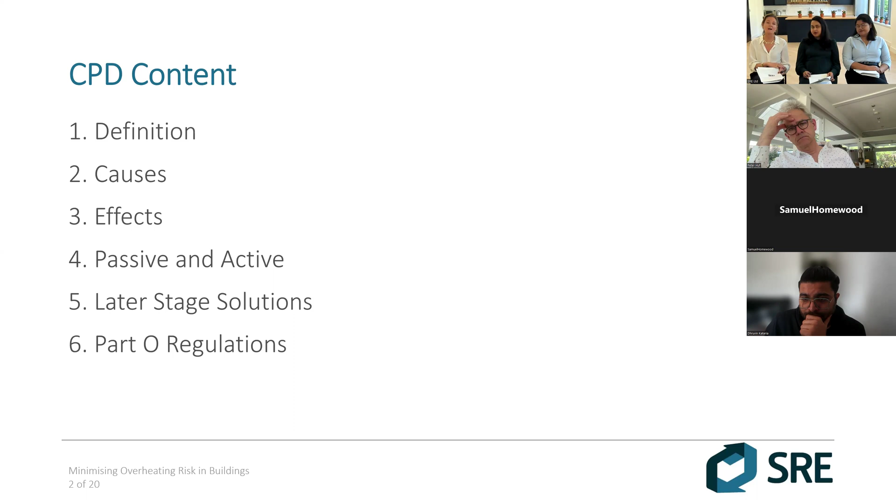We're aware that probably all of you will be involved in projects that are beyond the early stages of design, and also many of you will be working on retrofit projects. So we've tried to include an entire section looking at later stage design solutions, again, minimising overheating risk. And I'm sure you're all aware that it's Part O that has been brought in to legislate in this area. However, there are other standards where overheating needs to be taken into account.

I do need to say that we've actually had a fire alarm today, and we've been outside for quite a bit of the morning. So this presentation isn't going to be quite as slick as we would have wanted, but we have been practicing for a while. Meera, you're going to start with the definition.

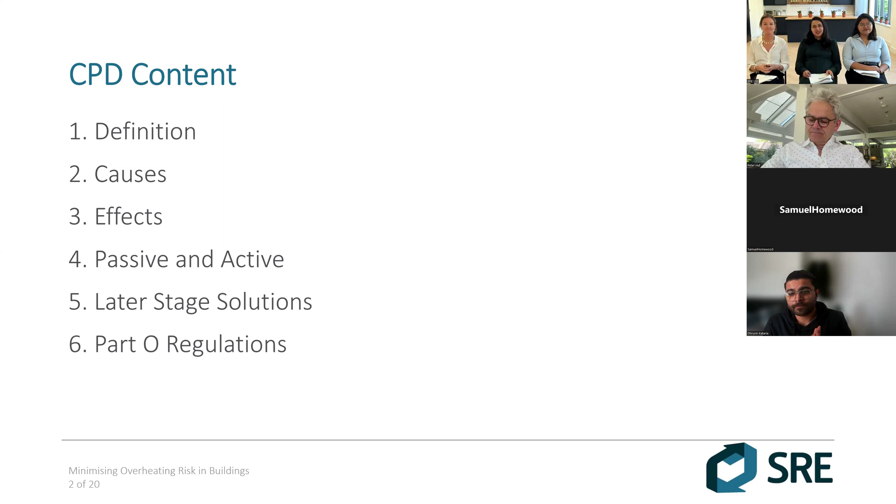Thanks, Anna. The term overheating refers to the discomfort to occupants caused by accumulation of warmth within a building. The World Health Organization guidance on thermal comfort states that in temperate zones, temperatures above 24 degrees Celsius can cause discomfort to the more fragile and susceptible members of the population. It is important to note that although air temperature is used to assess overheating, there are other environmental factors associated with overheating that affect the actual temperature as it is perceived by humans. These other environmental factors include lack of air movement, relative humidity, radiant heat, and period of exposure.

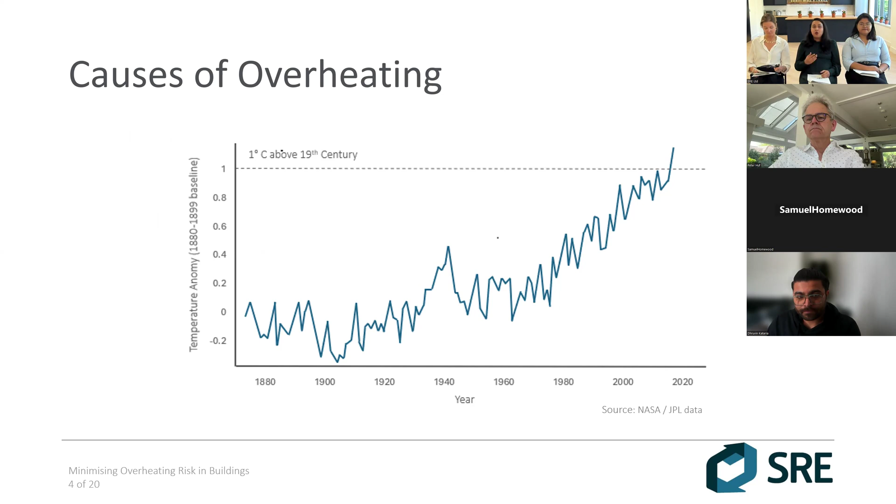Recently, human-induced climate change has had observable effects on the environment. As the graph shows, the global temperatures are rising, and as we all know, the global average temperatures have risen more than 1 degree Celsius above the average temperatures of the 19th century. Experts believe that if the global average temperature is not limited to well below 2 degrees Celsius above pre-industrial levels, we will have to face serious consequences of climate change.

As the temperatures increase, our cities warm up, creating a phenomenon known as the urban heat island effect. As part of the UK's drive to achieving net zero emissions by 2050, we are trying to reduce the energy demands of the building. For that, we are constructing highly insulated buildings with increased air tightness and low ventilation rates, which causes the heat to trap inside.

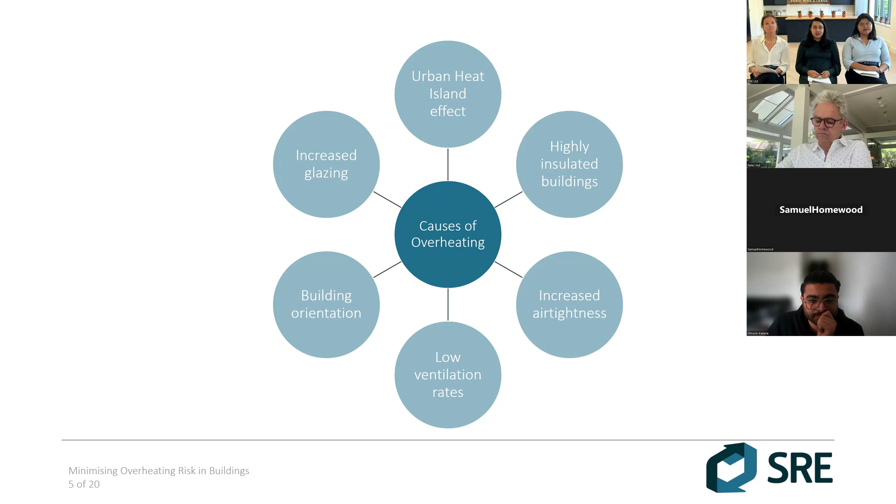Building orientation plays another key role. For example, if a building has its larger sides exposed to east and west, it has a high risk of overheating. This is because the solar gains are maximum from these orientations, and moreover, it's difficult to shade these sides. Most modern buildings today have high glazed areas, and this is another causal factor for overheating.

Low thermal mass becomes another reason for overheating. For example, most of the prefabricated structures that we use today have very low thermal mass. Prefabricated structures can be great in terms of quality, time, cost, and waste effectiveness. However, lack of thermal mass can lead to overheating.

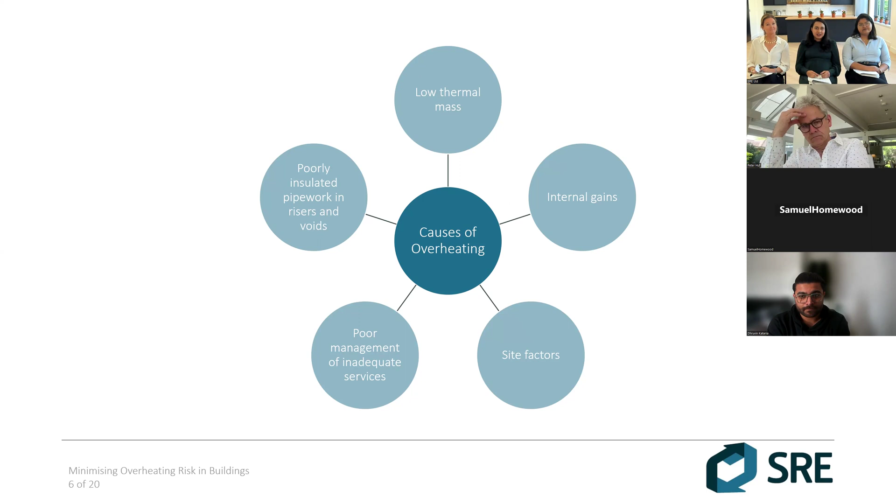Internal gains from various activities, people, equipment, appliances can all build up within a space. And if this built-up heat is not expelled from the building by natural or mechanical ventilation, it can lead to overheating. Sometimes there may be restrictions on opening windows due to noise, pollution, or security concerns. Poor management of inadequate services, poorly insulated pipework in risers and voids can all increase the risk of overheating in a building. Alisha will now explain why overheating becomes a concern.

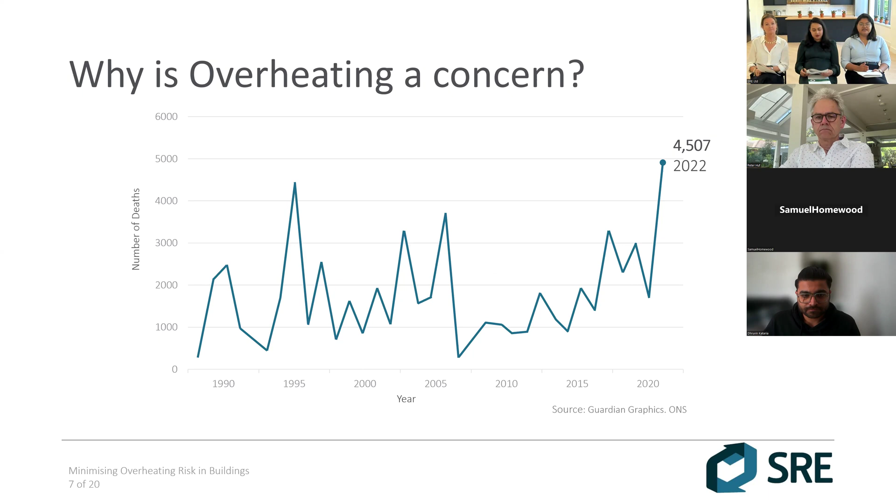As Anna had mentioned, excessive heat can reduce productivity and induce stress in people. Hot spaces can also cause heat-related issues in both elderly and young children. Overheating can cause sleep disruptions, which can lead to many other health issues. As shown on the graph, it is estimated that, on average, there are around 2,000 heat-related deaths in England and Wales each year. And with the temperature rising, it is estimated to more than triple by the middle of the century.

The UK Climate Projections 2018 predicts that there would be a 2-degree global warming above the 1981 to 2000 baseline by 2050 and a 4-degree global warming by 2080. However, although they are predicting a 4-degree global warming across the globe, this warming is not going to be uniform. The UKCP predicts that the south of England is going to overheat by around 8 degrees Celsius by 2080, whereas the global average temperature rise will only be 4 degrees Celsius.

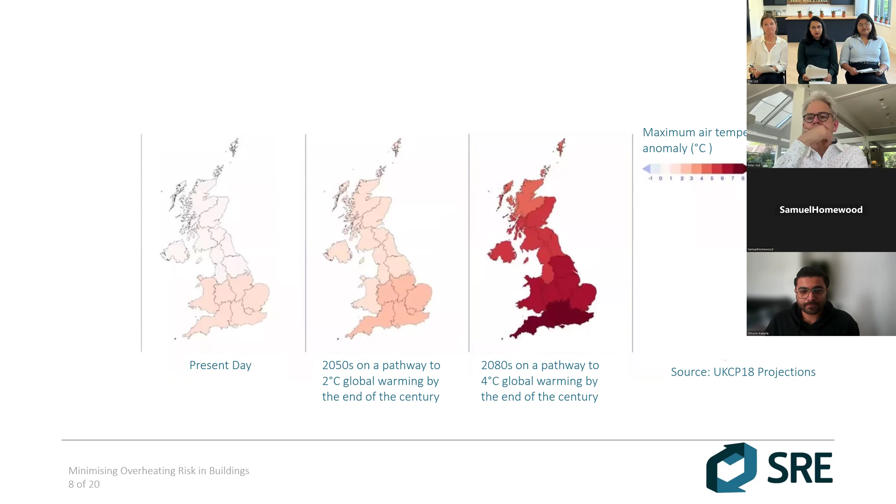There are a number of mitigation measures to reduce the risk of overheating. Ideally, passive measures will be considered in the early design stage in order to minimise the use of active measures. This is actually HUF HAUS's show house. We've been working with HUF HAUS since 2007. I know that we've got Peter Huf on this presentation, which is great. And they use passive measures quite extensively in the design and orientation of their buildings to good effect.

Building orientation needs to balance the need for solar gains in winter with the need for protection from the summer sun. Buildings should ideally be orientated with the largest facade facing south, ideally within 30 degrees plus or minus. Although changing a building's orientation isn't going to be viable for those of you who are doing retrofitting projects, adding external shading is. Horizontal shading is recommended for south-facing facades.

Overhangs and external shading: it's advised to subtend an angle of 60 degrees from the lowest level of glazing in order to ensure the building can benefit from the lower sun in the winter for solar gains and protect against the higher summer sun. On the east and west facing facades, vertical shading is recommended, and vertical fins or louvered shutters are examples of good vertical shading there.

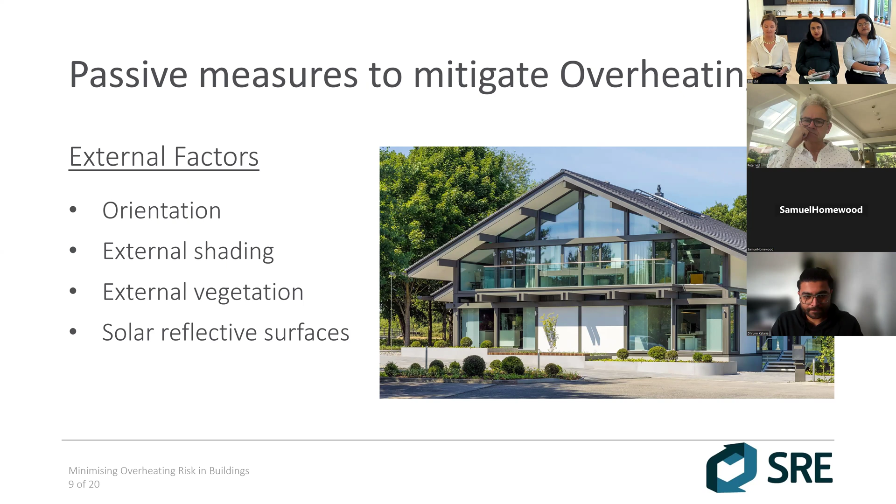We all know that glazing is very key for visual and thermal comfort in any building. And as Alicia has touched on, a lot of modern buildings do have a lot of glazing. However, there are important factors to consider in order to minimise overheating.

Firstly, it's important to have the correct window to wall ratio. Leading research organisations such as LETI and Passivhaus Trust publish guidance according to the building use. For example, they recommend 20 to 25% window to wall ratio for south-facing facades, and 10 to 15% window to wall ratio for east and west facing facades for residential buildings.

However, as we all know, each building is unique and each context is unique. So we also do glazing optimization studies to ensure that the glazing for your building is designed to maximize all benefits. Secondly, when choosing glazing, it's important to choose the correct glazing. And this is where we need to be thinking about U values and G values.

U values measure the rate of thermal transmittance through any structure or any building fabric. And it's really important to get the lowest U value that you can possibly get for your glazing in order to reduce heat loss in the winter.

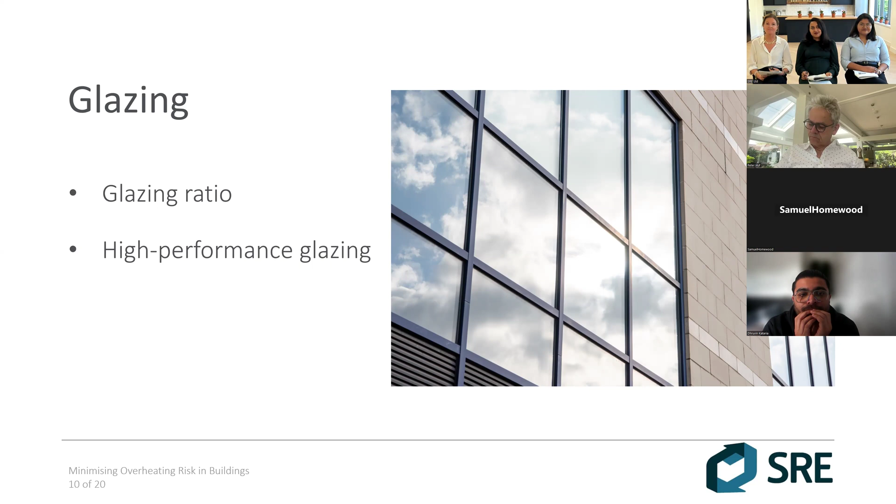So when it comes to the building form, a simple design is always preferred. The aim is to reduce the area of the exposed surfaces and obtain an optimal surface area to volume ratio. Simple design can also be great in terms of reducing the embodied carbon of the building.

As we all know, hot air tends to rise, and with higher ceilings, this hot air can accumulate at the top of the room, allowing the lower portion of the room to remain at a cooler temperature. And moreover, higher ceilings can foster airflow within a space and thus help in reducing the temperatures of the spaces.

Thermal mass is the material's capacity to absorb, store, and release heat. Thermal mass can be used to absorb heat during the day, preventing overheating of the spaces. And at night, when it is cooler outside, the heat can be released back into the space. Timber and steel frame structures are classified as lightweight and hence have low thermal mass, whereas high thermal mass structures would be brick, concrete, or stone.

When considering thermal mass, it is important to consider the thermal lag of the material. Thermal lag is the rate at which a material absorbs, stores, and releases heat. When the material with correct thermal lag is applied to your building, thermal mass can be used to keep your building cool in summer. However, if it is not, it can cause discomfort and also increase your energy use.

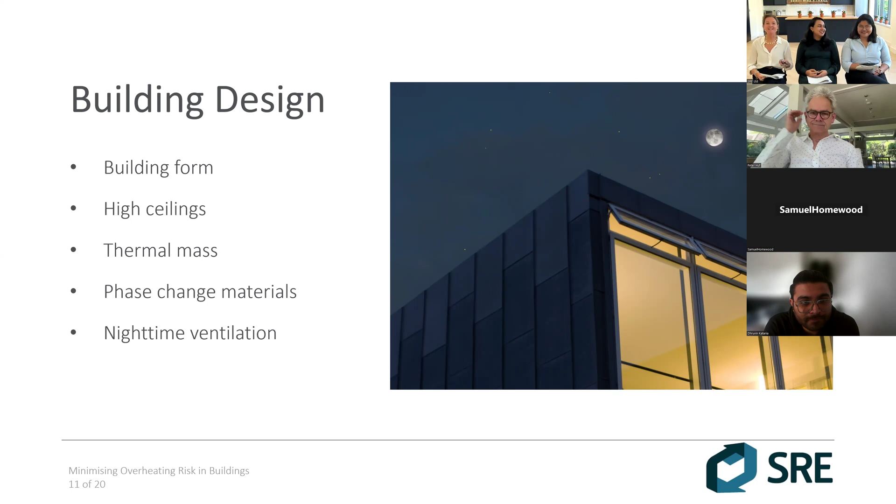Thank you, Meera. So ventilation plays a key role in maintaining the thermal comfort and the quality of air within spaces. So what better way to ventilate a space? The first and the obvious answer, openable windows. Whenever there are no restrictions placed on opening windows due to noise, pollution, or security reasons, we should always opt for openable windows as much as possible. And also the right placement of windows is very important.

Although we can achieve cross ventilation by adding openings on opposite facades of a dwelling or on the adjacent facades of the dwelling, the Approved Document Part O defines cross ventilation as the ability to ventilate a space using openings on the opposite facades of a dwelling and not by way of openings on the adjacent facade. Hence, corner flats pose issues with cross ventilation. The next one would be stack ventilation.

Stack ventilation is a commonly used technique where it uses the principle that with air pressure differences due to height, the air is pulled from the spaces and released outside. The temperature difference moves the air, and the hot air, which is of lower pressure, rises up and is replaced by the colder air, which is from outside.

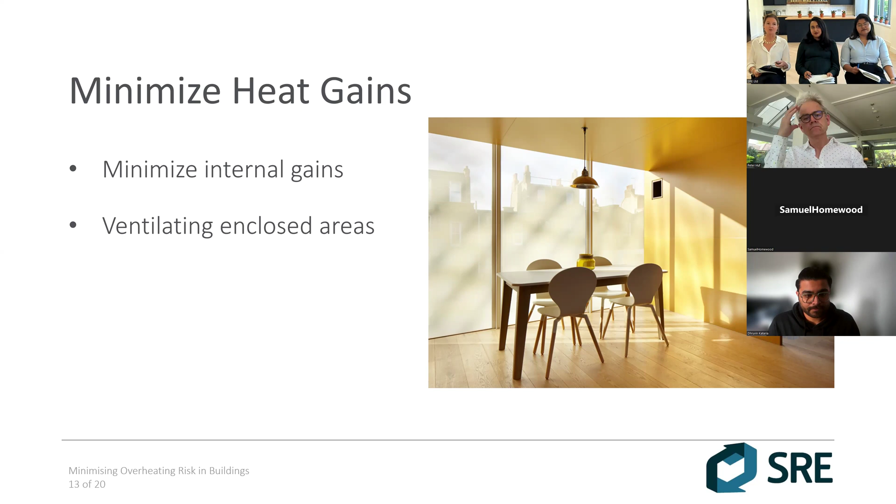Meera Davies is now going to look at more of the active measures that need to be considered for minimising overheating risk. As Anna explained, we always try to recommend passive measures, but sometimes active measures are inevitable. So we discuss some of them. MVHR stands for Mechanical Ventilation with Heat Recovery. It is a whole house ventilation system that supplies and extracts air from the property.

This system can reduce the heating and cooling demands of your building, and if correctly installed, can make your home more energy efficient. It should be noted that for the MVHR systems to work efficiently, you need to have a good air tightness level for the building. And we recommend MVHR in situations where natural ventilation alone cannot solve the overheating issue, and also where there are restrictions in opening windows due to noise, pollution, or security.

Purge ventilation is a manually controlled ventilation of a space or a room at a relatively high rate to rapidly dilute the pollutants or water vapor. It can be done by active measures, by the use of fans or extract, and by natural measures, for example, by opening the windows. Adding ceiling fans to the space can greatly reduce the overheating. Although it doesn't reduce the air temperature, it can, however, mitigate the effects of overheating on building users.

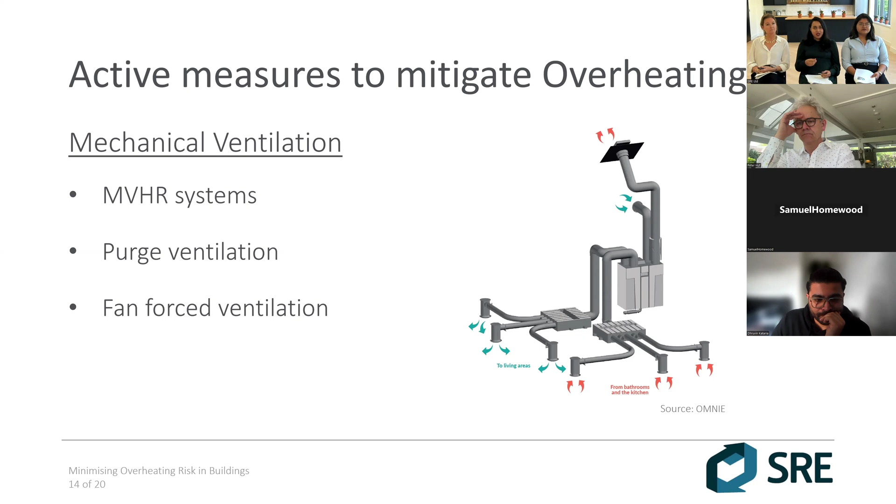And whenever there is a communal system present in the building, we generally give recommendations on how to reduce the heat gains from these systems, so the architects can coordinate with the mechanical engineers to ensure that these recommendations are followed. Some of the recommendations include adding insulation to pipeworks, heat interface units and storage vessels, lowering the flow temperatures in the communal pipework and systems, having energy efficient systems and control strategies, and minimizing pipe runs.

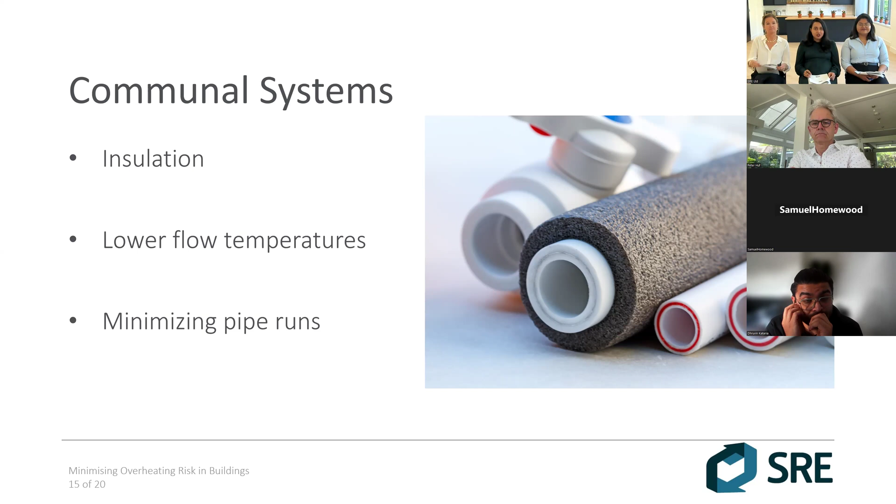Alicia will now cover other design recommendations and solutions that can be considered at later stages of the design. Thank you, Mira. It is best practice to always involve a sustainability consultant as early as possible so they can make the appropriate recommendations. Unfortunately, this is not always the case, and it leaves them constrained to very minimal design solutions, which often interfere with the frozen design. However, we are recommending certain solutions that can be noted when we are too far ahead in the design stage.

We had already mentioned that not all windows can be opened due to restrictions posed by noise, pollution, or security reasons. But wherever feasible, we have to opt for openable windows and reduced fixed glazing. The approved document Part O puts restrictions on opening ground floor bedroom windows at night due to security reasons. In such situations, we can opt for tilt and turn windows, which can open as side hung during the day and as bottom hung during the night, providing secure nighttime ventilation. In addition, we can also incorporate security grills or internal lockable louvred shutters.

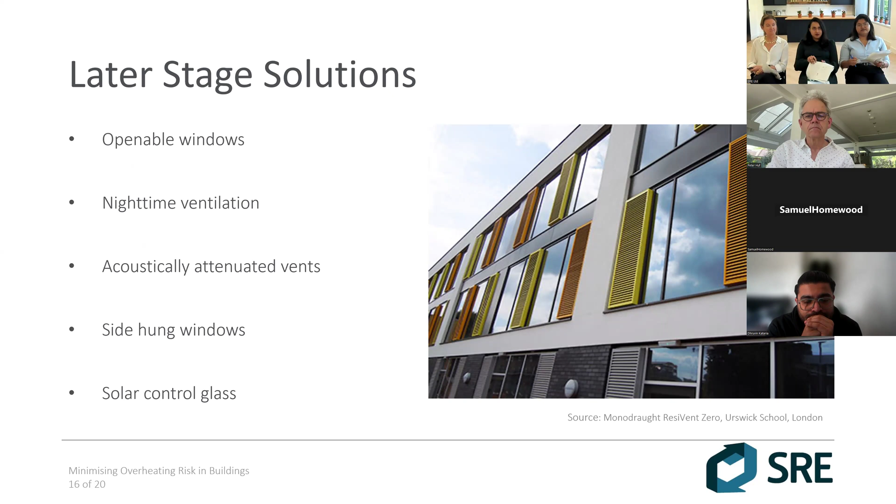When the previous recommendations are not feasible or good enough to bring your building to pass the Part O overheating assessment, you can look at ways to incorporate thermal mass into the structure. So the first and the easiest fix would be to add phase change materials, as it can easily replace the plasterboards from the walls and ceiling and add that extra thermal mass.

But it has to be noted that phase change materials are relatively expensive, and so it is not feasible for the majority of the projects. In such situations, you can always replace the lightweight internal partitions with blockwork. In one of our recent projects in Hounslow, which was a council home, we had recommended swapping the internal lightweight partitions with blockwork, which has significantly improved the thermal mass and helped the building achieve the required credits for Part O. Similarly, exposed concrete or exposed surfaces can also significantly improve the thermal mass of the structure.

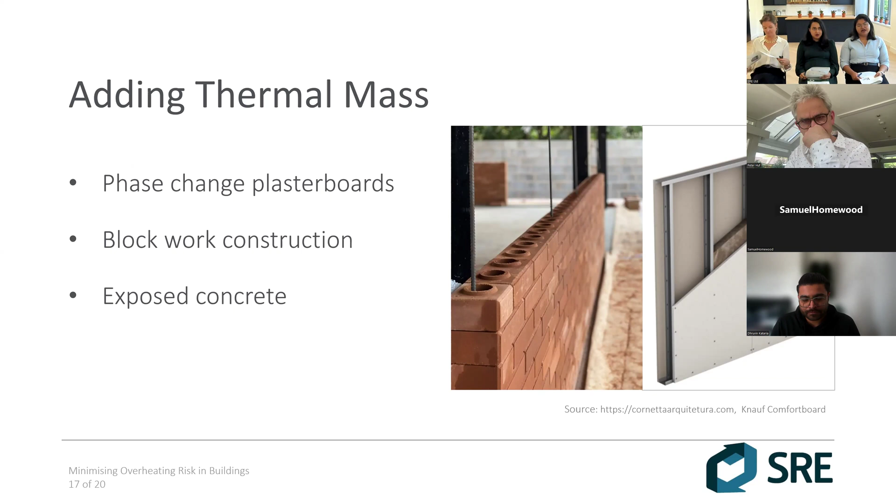Now we move on to regulation standards and methodologies. Part O became mandatory for residential buildings in the UK in June 2022. And the buildings that need to comply with Part O include residences, flats, student accommodations, care homes, and accommodation for children below 5 years of age. Often clients have asked us why student accommodation and care homes are assessed under Part O, whereas hotels are not. And this has to do with the period of occupancy. Hotels have a shorter period of occupancy, whereas student accommodation and care homes have a prolonged occupancy.

And there are two ways to achieve Part O regulations: the simplified method and the dynamic simulation method. In the simplified method, your building needs to satisfy certain criteria regarding location, external shading, maximum glazing area, G value of the glazing, minimum free area, and of course, cross ventilation. Whereas the dynamic simulation route follows TM59 methodologies. However, it has got certain additional conditions beyond the TM59 methodology.

Over a period of time, our clients have contacted us with several questions regarding Part O, and so we are going to cover some of the frequently asked questions here. Part O or TM59 has some additional criteria for bedrooms and for the nighttime temperatures of the bedrooms, and so the bedrooms will have to meet both daytime and nighttime criteria. And as Alicia explained earlier, as per Part O, the ground floor bedroom windows cannot be opened at night unless there are secure measures to open them.

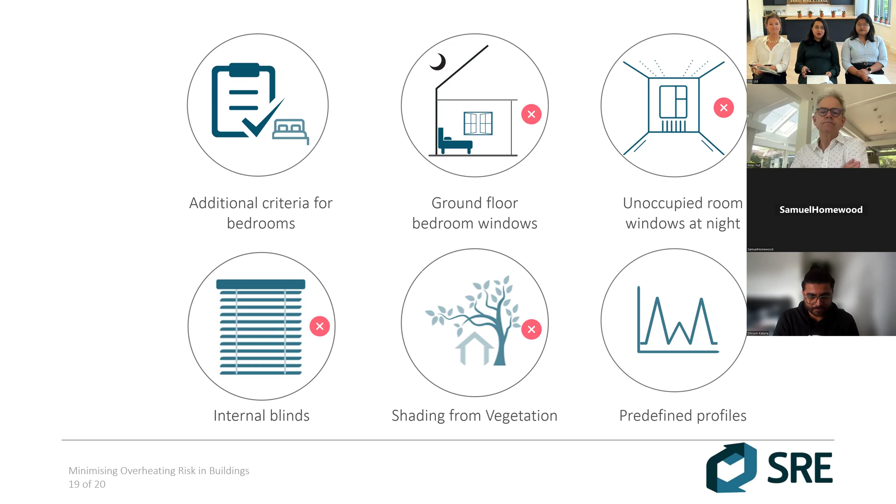In addition to that, Part O requires the building to be assessed with a future weather scenario. It is not mandatory to achieve a pass with the future weather scenario. However, the results have to be documented and future recommendations will also have to be provided. Often clients ask us, if the building does not comply with the future weather files, can we delete this section from the report? We'd like to take this opportunity to clarify that we are not able to do it, because it is mandatory that the section is included in the report and the recommendations are provided. And I will now explain about other standards and methodologies.

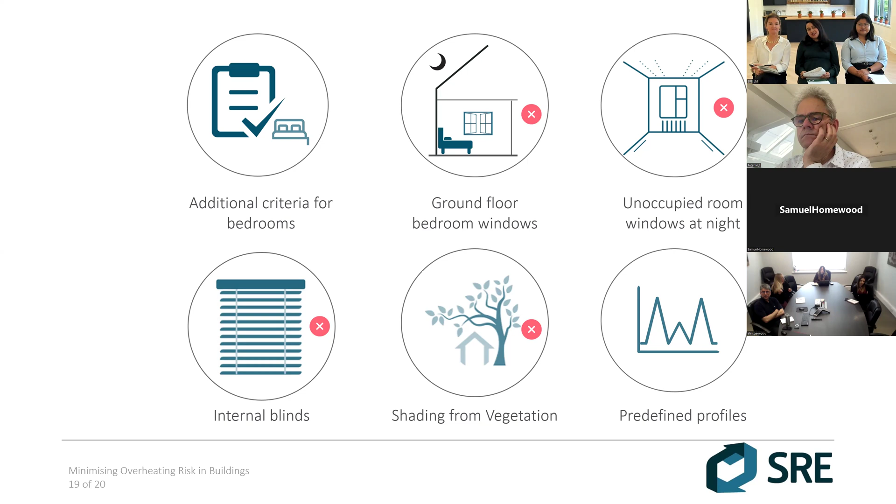I'm realizing we're eating into our time for questions. So just briefly, although Part O is the only regulation that applies specifically to overheating, we've got on the screen a list of others where overheating does need to be taken into account. These standards include TM52, which is CIBSE guidance, BB, which stands for Building Bulletin 101, which is school guidance published by the government and applies specifically to schools, and HTM, which is published by the NHS for healthcare buildings.

The London Plan recommends the cooling hierarchy, and that's something that we've been talking about a bit indirectly today. Obviously, they do ask for consideration to be placed on passive measures before even looking at active measures. And complying with all these above standards is also necessary to achieve certain credits for BREEAM, LEED and WELL.

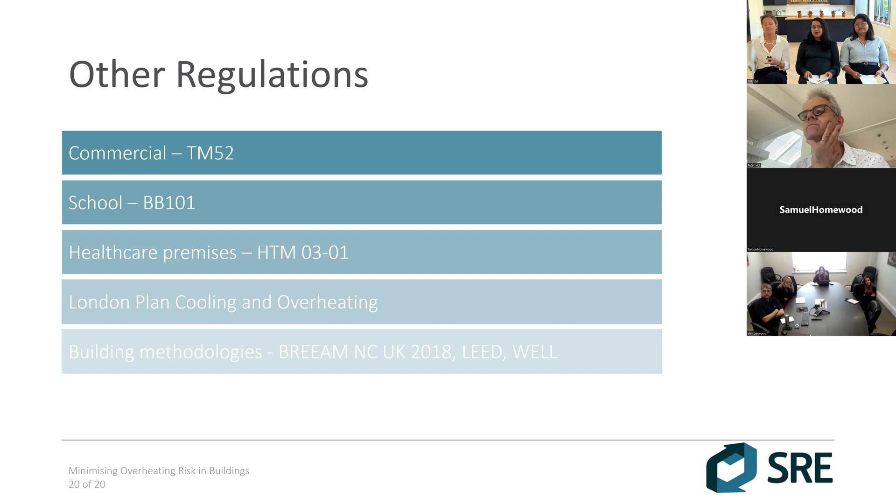I'd like to learn more about the phase change material. Peter, good to see you. Thank you. Mira, do you want to answer?

So phase change materials, as we explained earlier, come in the form of a plasterboard, and can be applied to your walls or ceilings, and give an equivalent thermal mass to that of high thermal mass structures, and so that's why we recommend that. Is it thicker? It is as thick as a plasterboard, which can be roughly 15 mm thick. And the 15 mm thickness can give you an equivalent thermal mass to that of 100 mm concrete, which is why it is great. And when we have incorporated them in the dynamic simulations, we have found that the results improve drastically.

Does that help, Peter? Yeah, I need to learn more about it because I haven't heard about it, but it sounds expensive and I don't know how the surface is of that. Is it like plasterboard? Yeah.

Yes. They are expensive, and so we do make a recommendation to several projects. However, it's the cost constraints that come into play. So we will also refer to the other measures. However, they can be considered. Also, we need to be careful: in some situations, there may be fire regulations that interfere with this material. So that should also be taken into consideration when we're considering phase change materials.